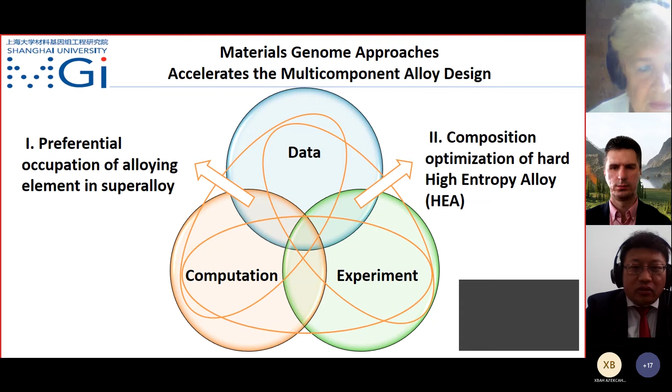The first part is machine learning prediction of alloy element occupation in nickel-based superalloy. If we look at the history of computational material science, we can classify it into 3 generations. This is part of an opinion from a review in Nature. The first generation is, for a given structure, we calculate the energy, optimize the structure, and get the property. For the second generation, we don't need the structure. We only need to know the composition, and from there we do the global structure optimization, get the structure, and then calculate the property of that structure.

Just recently, we started the third generation. Basically, it's a statistically driven design. The starting point is chemical physical data. We start from that data and do the machine learning, and then we get the composition of the designed materials, and from there we can calculate the structure and the property, etc. So basically, the starting point is data.

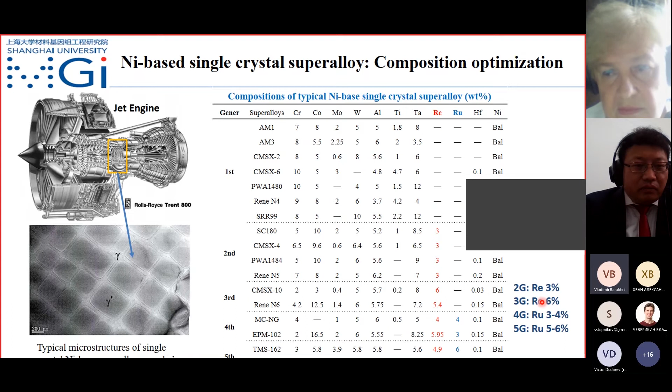For example, starting from the second generation, we add rhenium, Re, and we add more Re at the third generation, and start to add ruthenium, Ru, from the fourth generation, and add more in the fifth generation. So it's very important to understand how these key elements affect the mechanical properties.

The workflow of machine learning based research is we first need the generated data. In this case, we use first principles computation to generate the data, and then we need to design a descriptor or feature to describe the structure. Then we give this descriptor to the machine learning model and build the model for prediction. Up to this point, this is the typical process of machine learning.

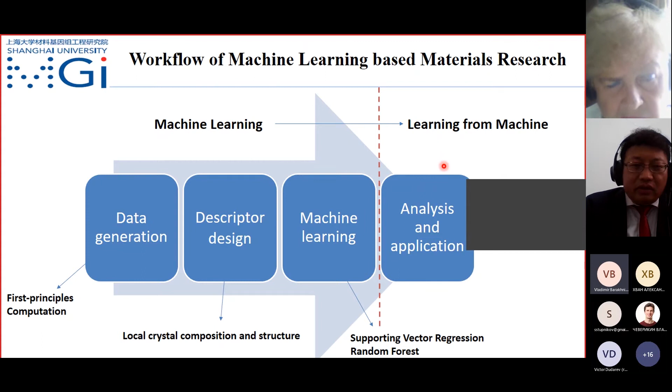But as material scientists, we also emphasize what we should do after machine learning. We should do the learning from machine. So we need to go from machine learning to learning from machine. It means after we build a good machine learning model, we need to do the model analysis and apply this model to understand the materials. That's also very important. I will give an example of how to do this in this talk.

First we need to do the computation to get the data. In this case, we have 11 alloy elements. These are common elements in the single crystal superalloy. In this case, we studied two substitution sites, either in the gamma phase or gamma prime phase, because these are the main phases in the nickel-based superalloy. And we replace the nickel and aluminum with the 11 elements.

So there are a lot of substitutions. The number of combinations is huge in principle, but in this case, we calculated more than 400 cases. It's not possible to exhaust all combinations of substitution configurations, so we just do some of them. In this case, we calculate 400, and then we hope to build a good machine learning model to predict more substitution energies.

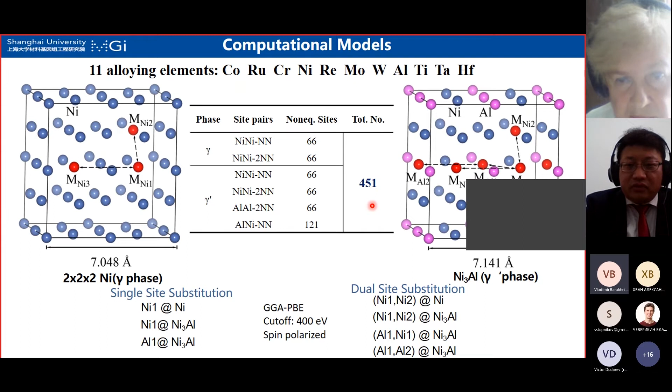So that will save a lot of computational cost. Okay, so that's the goal. So what we calculate is two things. One is the substitution energy, which is the energy change before and after substitution, and also the geometry change, how the bond length changes due to the doping. Okay, so that's basically the computational property. It is also the target for the machine learning prediction.

Okay. So then we need to build the features or descriptors. Our philosophy is that we don't want to use very expensive features. So we start from very elemental properties of the element or pure substance. These are the basic elemental properties we used in this work, including the atomic weight, density, radius, the melting point, or bulk modulus, etc.

When we were looking for this data, we got these basic properties from this website. I think many of you are familiar with this. It's called the Database of Properties of Chemical Elements from Baikov Institute of Metallurgy and Materials Science. Okay. So that's a starting point. We don't need to do a lot of expensive calculations or experiments, just use the database.

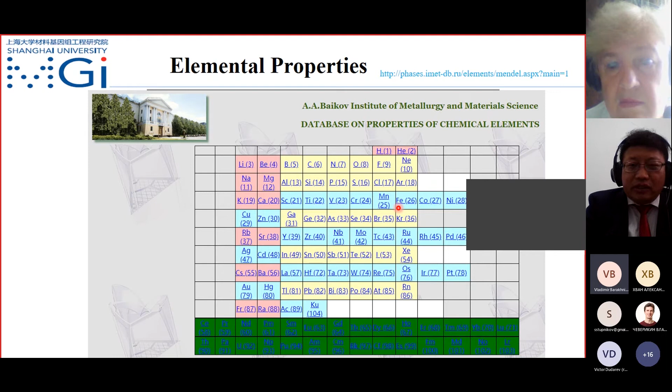Okay, so once we have these elemental properties, we need to build compound features to describe the system we are interested in. So we propose the so-called center environment model. Traditionally people use the composition model, basically just the formula of the materials, and then they do a linear combination with the mole ratio as the weight to combine these elemental properties to build a compound feature.

But in this case, we know the material property is very sensitive to the structure, not just the chemical composition. So in our model, we include the structure information into the features. We define the red atom here, for example, as the center atom. This is the atom that is going to be substituted. It's a Ni element. And then we define the first neighbor and second neighbor as the environment atoms, which contribute the effect from the environment. And then we build the features including both the center and the environment atoms.

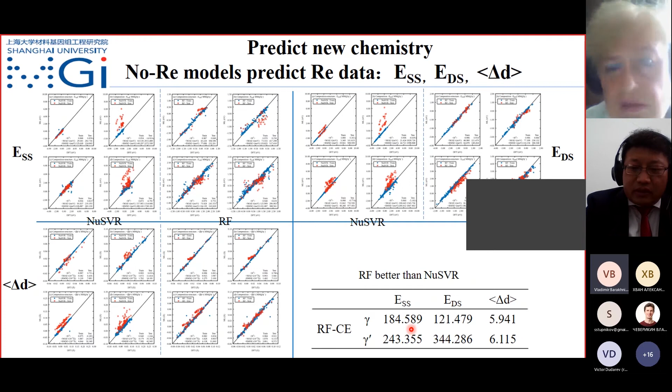So that means if we predict a completely new element that was not seen before in the training, then the prediction is not very good. It is worse than if it was there. Okay. And we compare with the leave-one-out method for each new element, and this is the result.

So basically, for most of the transition metals, it works well, not that bad, but we have a large error for aluminum and titanium. The reasons are obvious, because aluminum has p electrons, not d electrons like the others. And titanium is an early transition metal, so it's different from the other transition metals.

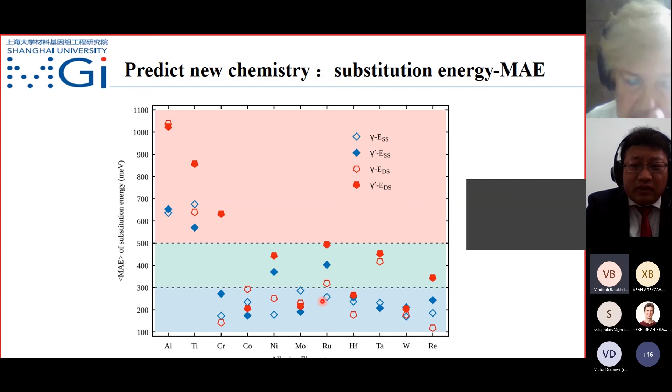So this is the prediction, and how best we can do. If we use all data, we can actually reach 20 milli-eV, so that's 10 or 20, even less than 10. So that's the accuracy machine learning can achieve. It's already sort of DFT accuracy.

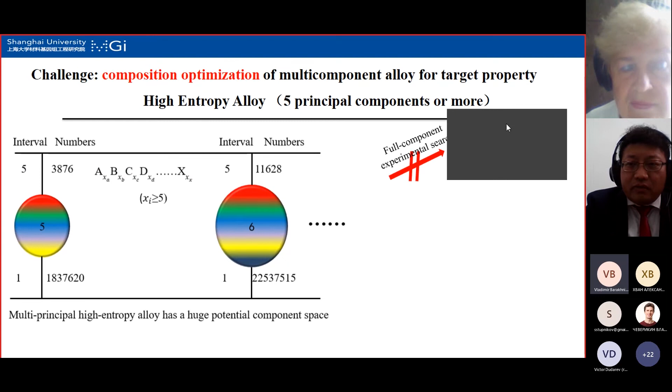So the next part is about the experiment. We use machine learning to guide high throughput experiments to optimize the composition of high entropy alloys, HEA. HEA is becoming very popular. Basically it contains 5 principal components, so it has a huge composition parameter space. With traditional methods, it's not possible to study all these materials.

So now we have new tools. The first tool is high throughput experiment tools, so we can prepare samples in less time than before. We also have a machine learning prediction model, so we can predict good compositions and do fewer experiments. Both actually accelerate the development of new alloys.

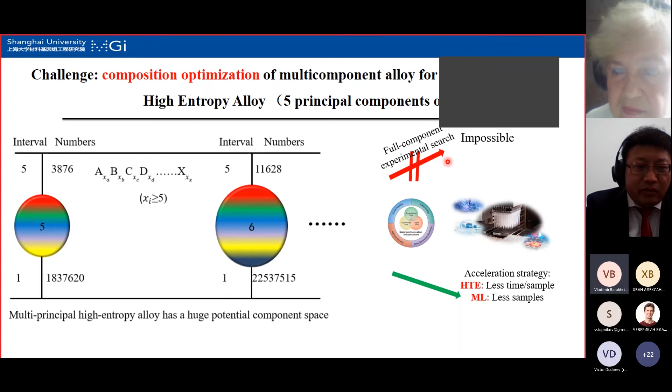So this is the workflow of our work. Basically, we have the flow of HTE, the high throughput experiment, and the flow of machine learning. We do iterative development, going back and forth between HTE and machine learning. For example, we generate data first, then build a machine learning model and predict the next experiment. Then we update our model to improve prediction accuracy and see if it agrees with the experiment. If it agrees, we go next. If not, we go back to do more experiments and more predictions.

So we do this iterative optimization until we are satisfied with our prediction and with the property of our materials, and then we can do deeper analysis of structure and property, etc. We can also dig out correlations, for example the composition-property relationship, or the descriptor-property relationship. So we need to go from machine learning to learning from machine.

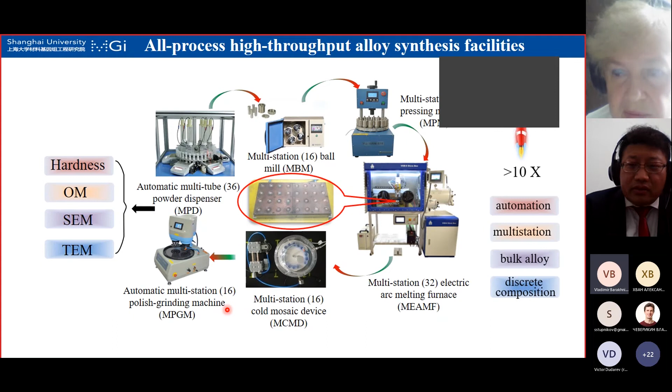All these machines are multi-station, so overall it can accelerate the synthesis at least 10 times. Okay, so then we generate the data. I'm not sure if I have enough time, so I'll go quickly and skip this unless you have questions.

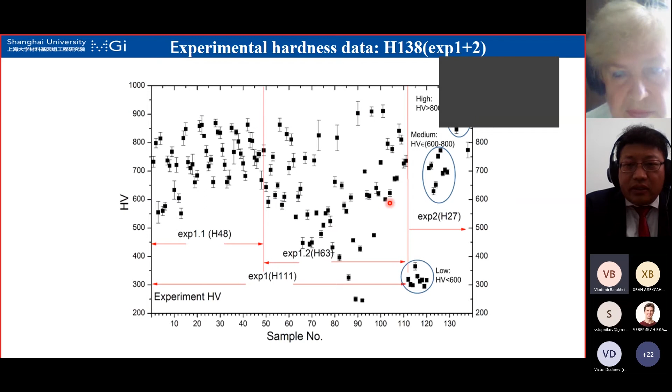We generate data first, and then we do several rounds. We measure the hardness of the alloy as the target. In the first round, the hardness values are pretty high. In the second round, we generate hardness that is medium or low, so we have data variety. That is important for building a good model. Then we predict new ones and do experimental verification, etc.

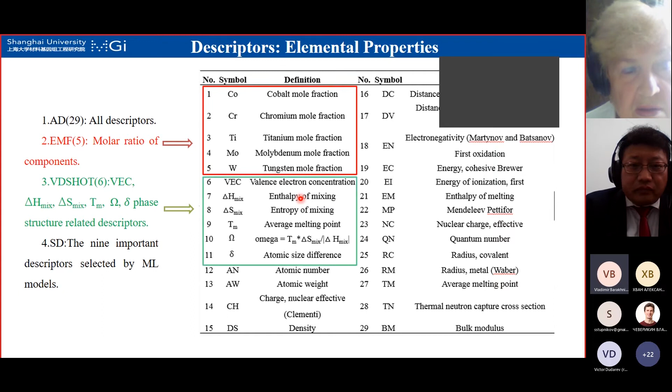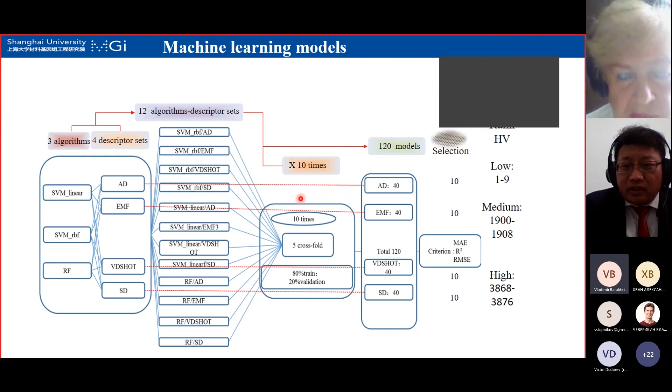Again, we start from these elemental properties, plus some compound features from the literature, like enthalpy of mixing or entropy of mixing, etc. Then we try several algorithms and combinations of algorithms and descriptors, do 10 times training, generate 120 models, and take the statistical average to get the result. So this is just sort of routine.

If we did this by traditional linear regression, we'd actually get contradictory results, which means machine learning is really necessary in this case. We do several rounds, improving our accuracy, and the best model is the support vector machine. We can reach an error around 5-6%. The intrinsic experimental error is around 2, so ours is slightly higher than the experimental error, but it's pretty good.

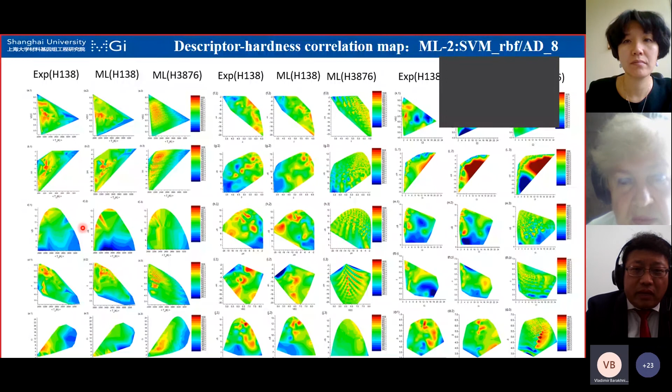This is experiment, the middle one is machine learning, and then we use machine learning to predict all 3,876 compositions. They all look similar, and with such a map we can predict hard HEA materials very quickly, for example, with high melting point and medium valence electron concentration. We can do this for all possible combinations of the features we use, so we can do very quick prediction for new alloys. The comparison between experiment and prediction agrees pretty well overall.

So I think this is the summary. We combine high throughput experiments with machine learning to accelerate the composition optimization of high entropy alloys. If we apply the HTE, high throughput experiment facility, we can accelerate composition optimization by 10 times. And with machine learning we do fewer experiments, giving a 20 times acceleration. Combining these two, 10 times 20, we can accelerate composition optimization by 200 times. MGI promised 2 times faster development, but we can do two orders of magnitude higher than the promise.

It's also important to get new knowledge by going from machine learning to learning from machine. There are many ways to do that; I showed some examples, but there are many other ways to do model interpretation. We started from knowledge driven, now we are doing data driven design, and after learning from machine we can go back to knowledge driven at a higher level. So that's the end of my talk.

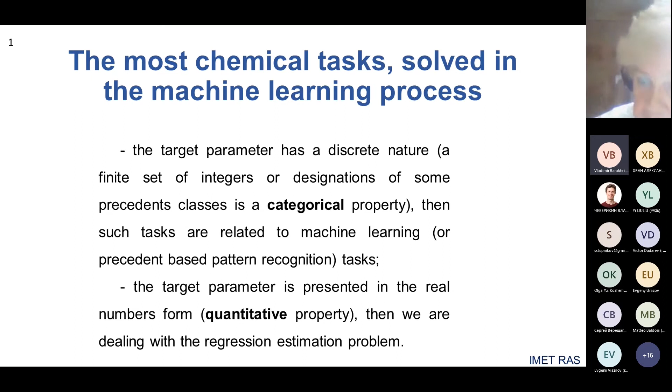Quantitative property: in this case, the target parameter has a value presented in the form of a real number. Such tasks are related to the regression estimation problem. Next slide.

Like all theoretical methods, machine learning has its limitations. The main limitation is the need for a sufficient and representative set of objects for machine learning. When predicting categorical properties, it is necessary to fulfill the main hypothesis of pattern recognition, the compactness hypothesis. In machine learning application to inorganic chemistry, the fulfillment of the latter is a consequence of the periodic law.

When predicting quantitative properties, it is important to have a statistical relationship between the target parameter and parameters of components. Next slide, please.

When developing and applying machine learning methods to inorganic chemistry, we should take into account the peculiarities of inorganic chemistry. First of all, the limited volumes of training samples, periodic dependencies of attribute values on atomic number, the target dependencies on smoothness of the attribute description, large dimension in combination with the small number of precedents for machine learning, and so on. Next slide, please.

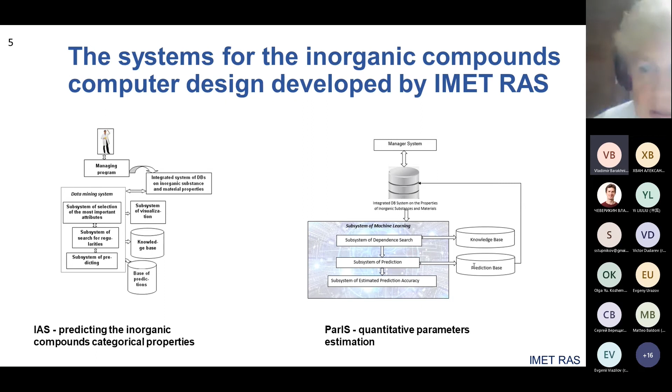Based on our experience, we will consider some of the possibilities of machine learning methods for solving problems in inorganic material science. Usually the problems of inorganic chemistry are connected with prediction of compound formation. In this case, precedent-based pattern recognition methods are successfully used.

The first task, which was solved by me half a century ago, was the prediction of new compounds of ABO3 composition. One of the most effective algorithms of that time was used, based on training of growing pyramidal networks, a special data structure in the computer memory, which accelerated the search for classifying regularities.

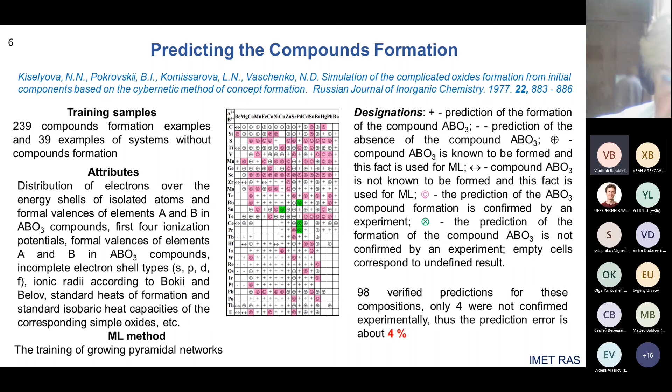Over the past years, many of these composition compounds have been obtained, and it became possible to compare our prediction with the new experimental data. From the 98 verified predictions for this composition, only 4 were not confirmed experimentally. Thus, the prediction error is about 4%. Next slide.

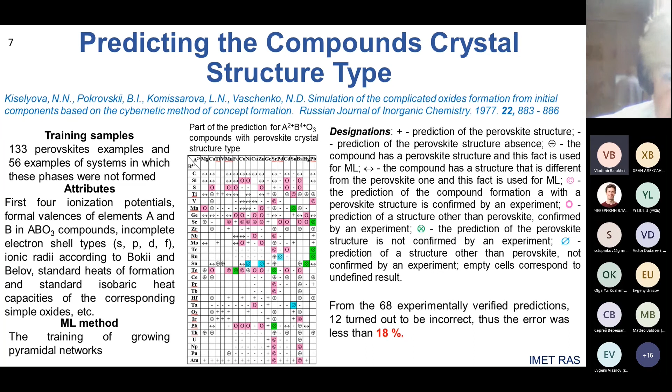Much more often, machine learning methods are used to solve the compounds' crystal structure type prediction problem. An example of such a solved problem is the ABO3 composition perovskite prediction, which we carried out in the 70s. The table shows the perovskite prediction comparison results with the new experimental data. From the 68 experimentally verified predictions, only 12 turned out to be incorrect. Thus, the errors were about 18%. Next slide.

Naturally, this very first experiment in machine learning method application is still far from the modern level. Taking into account our many years of experiments in inorganic compounds computer design, more advanced methods and programs for machine learning have been used. Now, the system for prediction of categorical compound properties includes the most popular pattern recognition programs.

The most promising means of improving prediction accuracy include collective decision-making methods. Our information analytical system developed in our institute contains several programs with such methods. Next slide.

We use other methods to improve prediction accuracy, taking into account the peculiarities of an inorganic object. One of the most successful ways to improve the prediction accuracy in the case of samples containing several classes of objects is multi-stage learning.

For expert evaluation of machine learning data, special programs have been developed for determining outliers in data. To fill in the gaps in the values of component properties, properties of chemical elements, interpolation is used, taking into account the periodic dependencies of element properties on other element parameters. In this case, the possibility of applying the machine learning method was also tested for quantitative property prediction.

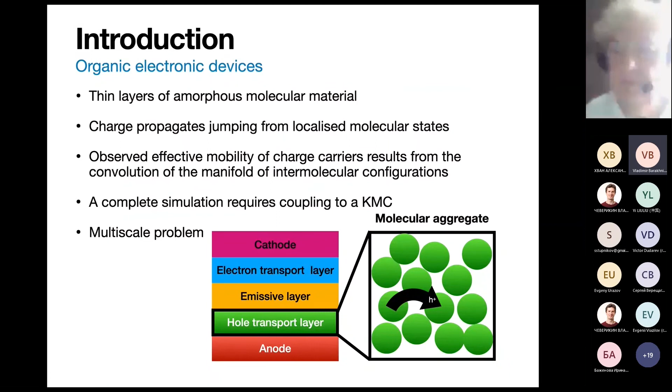So the observed effective mobility of charge carriers results from the convolution of a manifold of intermolecular configurations. In order to provide a complete simulation of the device, we need to couple these results with higher-scale simulations like kinetic Monte Carlo calculations. So this is inherently a multi-scale problem, and this is how we tackle it. This is a schematic of our general workflow.

We usually drive classical molecular dynamics codes to provide the morphology of large realistic aggregates. We analyze these aggregates from a morphological point of view, extract molecular pairs out of these configurations, and use them as input for computing the electronic coupling parameters, which are related to the flow of current in the device. Finally, we gather all of these results to provide distributions of these electronic parameters in order to scale up our simulation.

This is quite a technical slide, just to give you a flavor of the actual density functional based calculations. I hope you can see my mouse pointer. Basically, you have this kind of situation: two molecules, one charged, and this is the initial state. After a jump of the charge to the nearest neighbor, we have this movement of charge from one to another. So this is the initial state, and this is the final state.

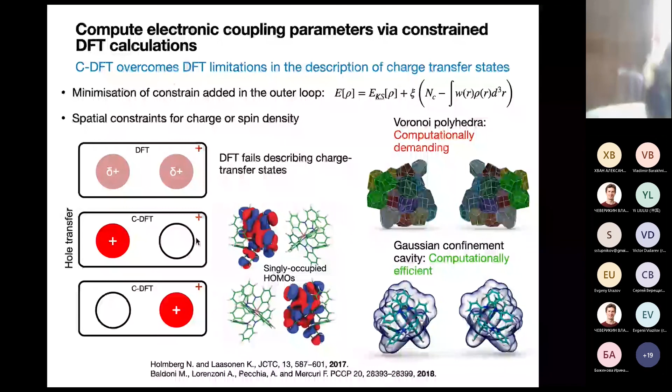So basically we can force the DFT to give us the right results in the two charge transfer states. And this is something from the past that we have done already, but there is no machine learning yet. So these are some results from what we have already published. At the beginning, we did some tuning of the method. We created some artificially modified configurations of molecular pairs, and we artificially moved them in order to understand how the electronic coupling is influenced by the configuration of the molecular pair.

So here you can see how this quantity is related to the distance between the two molecules, and really it's influenced by the rotation along some specific axis. So from this idealized structure, we go then to a more realistic sample of molecular aggregates. This is what you can get out of the molecular dynamics simulation.

We extract all the molecular pairs in several of this kind of sample. We do an analysis of their morphological and geometric configuration and calculate the electronic parameters for each couple, and then provide a distribution of these diabatic electronic coupling parameters.

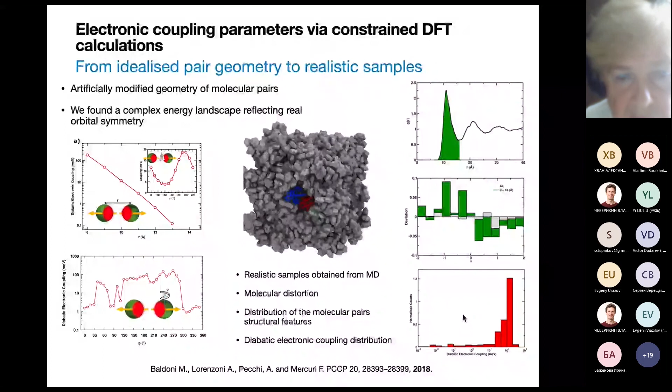So in order to provide a good distribution of these electronic parameters, we need to simulate thousands of these molecular pairs. And even though our implementation is quite computationally efficient, constrained DFT simulations are relatively computationally expensive. So we need at least 4 hours for each pair on a high-end computational node. So we do believe that a machine learning approach can increase dramatically the overall throughput. So we want to train our machine learning algorithms on the results obtained from constrained DFT calculations.

Apart from the algorithms themselves, it was immediately clear to us that data representation is crucial for this kind of problem. Why? Because the input and somehow the output of multiscale simulation are this kind of thing. So you have a representation of the structure in terms of a table, in which in each row you have 4 columns. The first one is about the element at a certain position, and then you have the X, Y, Z coordinates of the atom.

Usually this is all that you need for ab initio calculation, and this is an extremely human-friendly data representation, but it's not machine-friendly at all. And on top of that, it depends on the order of atomic entries, and it's not invariant with respect to translation and rotation. So we want to convert the feature, the atomic coordinates, into a more machine learning compatible format. It has to be, unfortunately, still human readable because we need to modify it by hand from time to time.

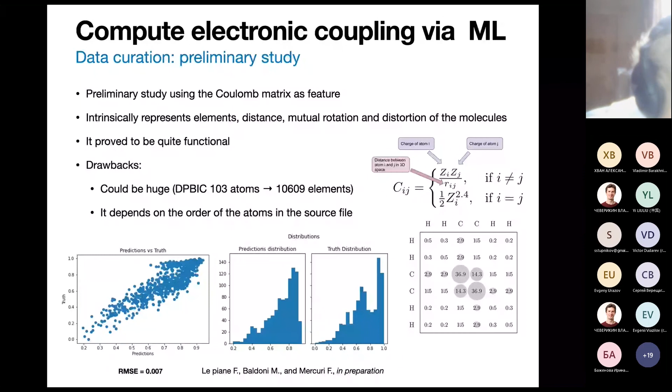So we made some tests and we found the best feature setup. So we can describe the distance, which is a major factor, as a scalar distance or as a vector distance, which is slightly better. Probably just because in the vector distance you have 3 components, so you have more degrees of freedom from a computational point of view.

The mutual rotation of the 2 molecules in the pair can be represented with quaternions or with the rotation matrix, and we found that the rotation matrix representation is the best one. The molecular distortion, which has a small influence but is still important, is represented by RMSD, so the root mean square displacement of the atomic position of the molecule in the real aggregate compared to the molecule in its idealized geometry, optimized in vacuum. So our best feature set is the distance vector plus the rotation matrix plus the RMSD.

So this was about the data structure, and I told you that this is the most important problem that we have to analyze. But of course, algorithms are important as well. So we tested 3 models. Actually, I didn't do that, but this is the work of our new PhD student, Fabio Le Piane, who has a very strong background in machine learning, and he is very helpful in this kind of situation. So he tested the random forest, a gradient boosting, and a kernel ridge regression. And he found that this is the best algorithm for our purpose.

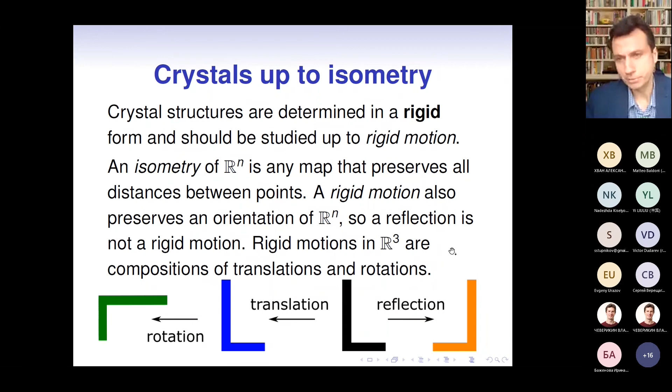Only for simplicity, I will talk about isometries, but if you know that two crystals are isometric, then it will be easy to distinguish them up to reflection as well. So only for simplicity, we will talk about isometry invariants. Invariants were mentioned in several talks this morning. So let me formally define it, because in mathematics, it's a very important concept in almost all branches.

So an invariant is a property. It could be a number, it could be a vector, a matrix, or even a more complicated object. But this invariant, property or function, should take the same value on all equivalent objects. So in our case, on all isometric crystals.

For example, we could start from a hexagonal lattice, and this hexagonal lattice could be represented by many different unit cells, primitive, non-primitive. But our aim is to map all these initial ambiguous inputs into one value of an invariant. Because all given representations should map to the same value, it is an invariant. And similarly for a square lattice, you could start from different representations, but an invariant should have the same value.

If you use non-invariants, for example, edge length of a unit cell, then this non-invariant can easily take two different values on two crystals, and we can make no conclusion in general. These two crystals could still be equivalent or still be different. That's why it's very important to use invariants. If an invariant takes different values, then our objects are certainly different.

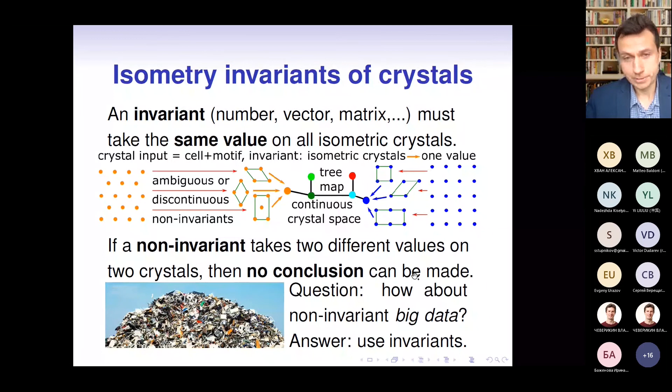Right. So what invariants are known? Of course, crystallographers knew about the ambiguity of a primitive cell, and tried to find a so-called canonical or reduced cell. One of the best such examples is Niggli's reduced cell.

However, any reduced cell, including Niggli's cell, is discontinuous under small atomic perturbations, as you can see in this very simple example. Let's start from a square lattice and perturb every other point slightly, so shift every second point from its position. Then immediately, any primitive cell, including Niggli's reduced cell, will double in size. So instead of a small square, our minimal unit cell will have twice larger volume, or it could even quadruple its volume.

So what does it mean? It means that this reduced cell is discontinuous, unstable under almost any atomic vibrations. That's why it's important not only to use invariants, but also to use continuous invariants that change only slightly under perturbations. So it would be nice, for example, to design invariants that see a small difference between the initial unit square lattice and a slightly perturbed periodic point set. Only in this way can we continuously quantify crystal similarity, the similarity between very similar, nearly identical crystals.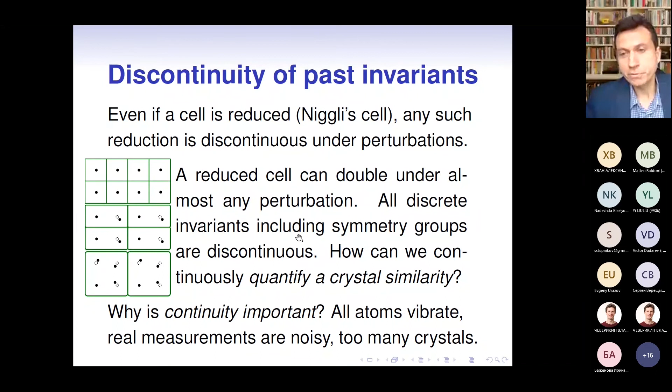So again, why is continuity important? All atoms vibrate. Of course, you know all real measurements are noisy, and the motivation from crystal structure prediction: we have too many crystals, at least too many predicted crystals.

So very briefly, crystal structure prediction aims to discover crystals by simulating them on the computer, and usually they start from almost random configurations of molecules put in almost random positions in a random unit cell, only making sure that they do not overlap, and then they perturb the positions to minimize the complicated energy function. Usually the lattice energy function, which we will discuss later in this talk.

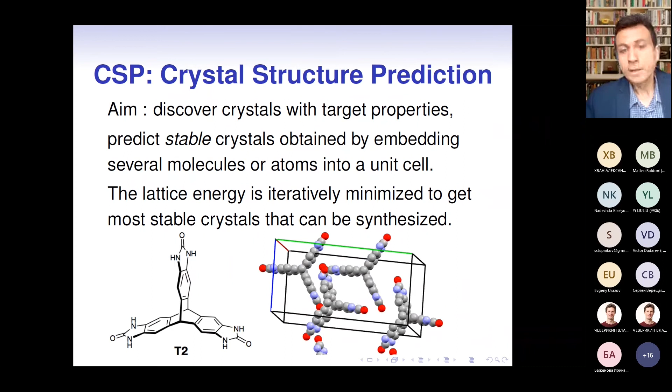And this approach in crystal structure prediction leads to the so-called embarrassment of over-prediction, which is the term coined by Professor Sally Price when I talked to her personally. So she simply said that many state-of-the-art crystal structure prediction tools output too many predictions, which approximate local minima of this complicated energy function. So of course, if we rerun our prediction algorithm many times, then inevitably we can easily finish close to the same local minimum, but coming from different directions.

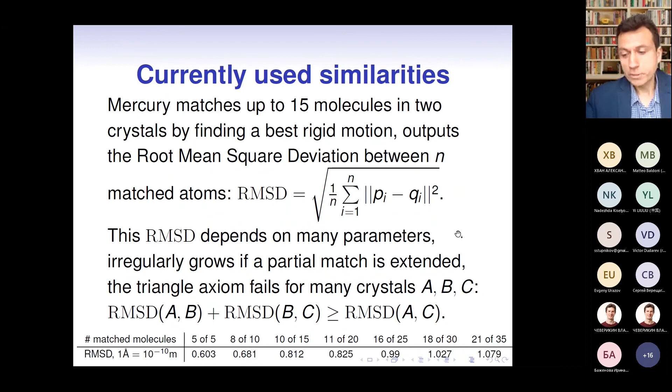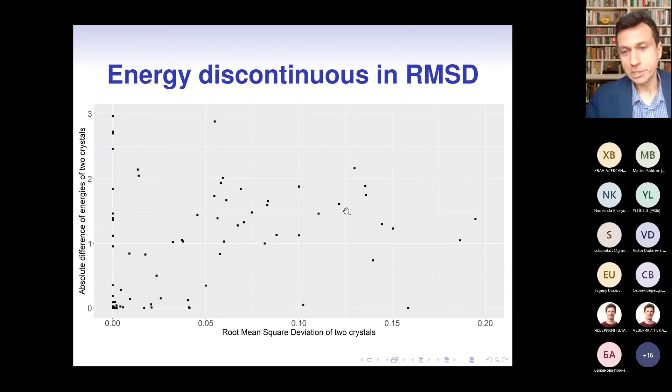So that's why we kept looking and designing new invariants, distance-based invariants in this case. And indeed, distances were mentioned in several past talks as good invariants of periodic structures. So that's a formal definition of the average minimum distance. We start from a periodic point set. And for every point Pi, we look at distances to its neighbors. First neighbor, second neighbor, and so on. So in the first picture, you see the square lattice. So the first neighbor of the origin has distance 1, and similarly, we have actually 4 neighbors at distance 1. Then we have 4 neighbors, diagonal points at distance √2, 4 neighbors at distance 2, and so on. For the hexagonal lattice, these distances are similarly increasing, but differently.

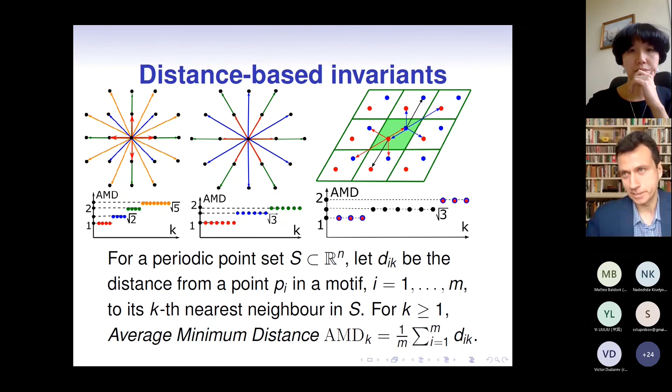But today I focus on the simpler AMD because the average minimum distance is a vector of numbers. So it's AMD1, AMD2, and so on, up to a given number k of neighbors. And this number k is a parameter. However, when we increase k, we don't change any previous values of the AMD invariant. So this k can be considered as an order of approximation, or the number of decimal points on your calculator. So you could compute up to 2 decimal points or up to 100. So you simply make better predictions.

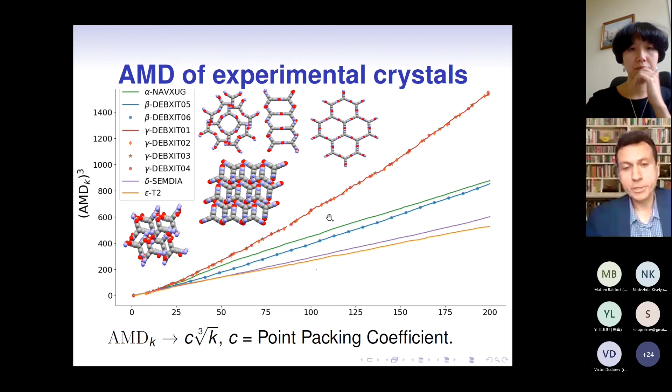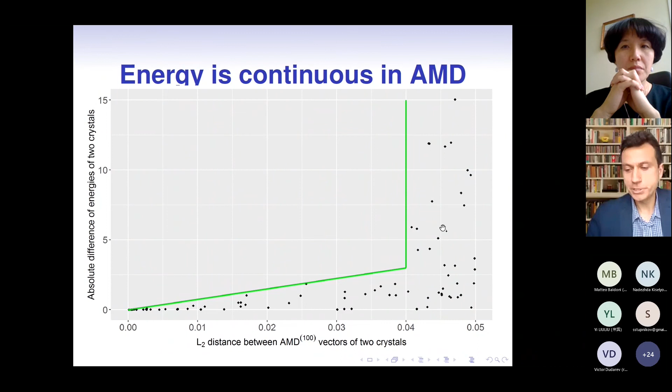Right. So this slide shows experimental computations for 9 experimental crystals, and let me go quickly to the continuity statement. So you see when the difference between AMD vectors changes slightly, the energy changes slightly, and this picture is very different from the previous one when we considered RMSD and powder X-ray diffraction patterns.

So you have noticed that we considered only points and no chemical information at all. So that's the key idea of periodic geometry, a new area looking at crystal structures from a pure geometric point of view. And this periodic geometry approach has already found interesting cases in the Cambridge Structural Database.

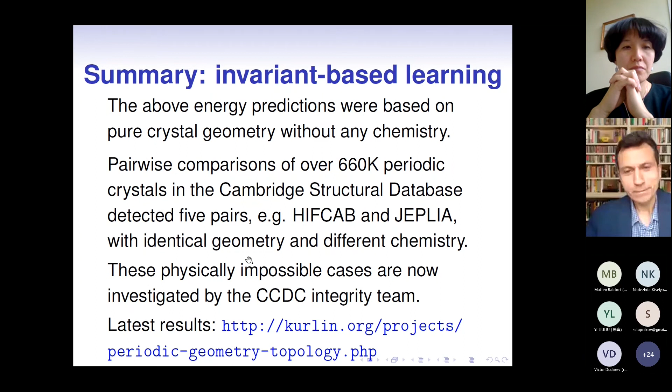So we detected 5 pairs. So this is one example where geometry was exactly the same, but chemistry was different. So all crystallographers told us that this is impossible, and indeed with... CCDC is now investigating... for this case.

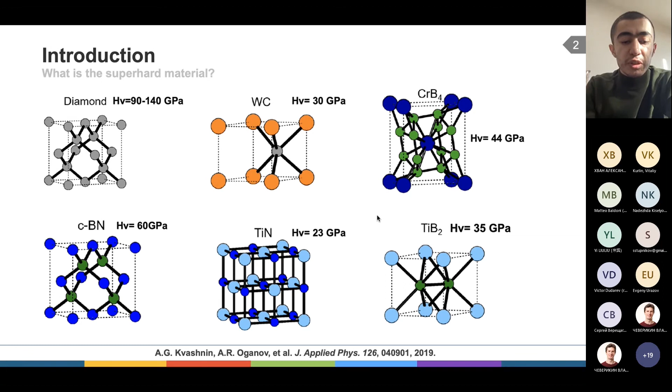Due to their unique properties, high hardness and also high melting temperature, superhard materials are widely used in many industrial applications, like stamping and cutting tools, drilling equipment, and also in spacecraft. For example, drilling equipment, which is needed to produce oil, usually uses polycrystalline diamond or cubic boron nitride, or a mixture of them.

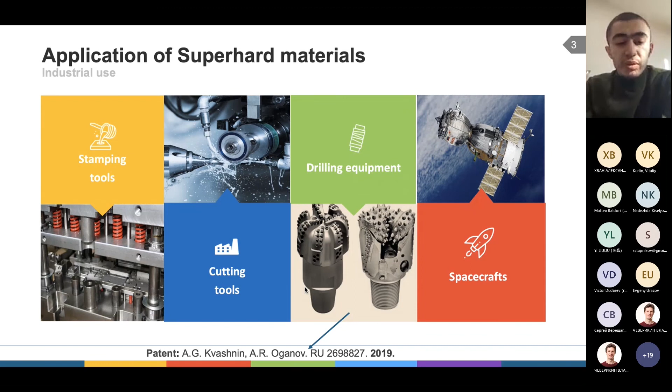And the main direction of development in this field of technology is the replacement of traditional expensive materials by new ones with improved properties. And due to the fact that most synthesized new materials are polycrystalline or multi-phase materials, there is a need to create methods that can describe the mechanical properties of such complex systems with high accuracy. And of course, existing quantum mechanical methods are expensive and not able to describe such large systems. Also, they have a good accuracy.

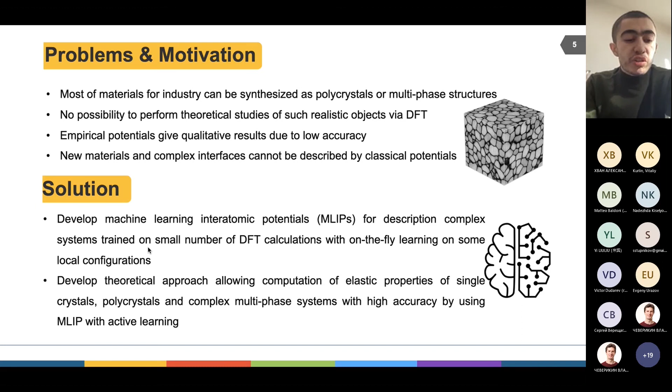And also classical empirical methods are able to describe such systems, but the accuracy of calculation is rather low. Moreover, in polycrystals, there is an interface between grains that does not have a crystalline structure, and describing exactly the grain boundary is a difficult task for empirical potentials. And to solve this problem in our project, we developed an automatic algorithm for calculating the main mechanical properties of polycrystalline materials where the interatomic interaction is described by machine learning interatomic potentials.

We employ the moment tensor potentials as a model for approximation of density functional theory calculated energy. MTP, moment tensor potentials, are based on a representation of atomic environments as a tensor of inertia of different ranks, in practice usually fifth rank, multiplied by a radial polynomial function. And the main goal is to estimate the set of parameters which define the form of the moment tensor potential as a function of the training set.

The training of the MTPs can be done by solving the minimization problem. This type of potential accounts for local atomic arrangement and expands the total configuration energy into the sum of contributions of individual atomic environments, which we can also call atomic neighborhoods. Each neighborhood contribution is expanded through the set of basis functions. When fitting to the energy values, we need to solve the overdetermined system of linear equations, and each equation of this system is produced by a certain configuration, and it can be called the active learning set.

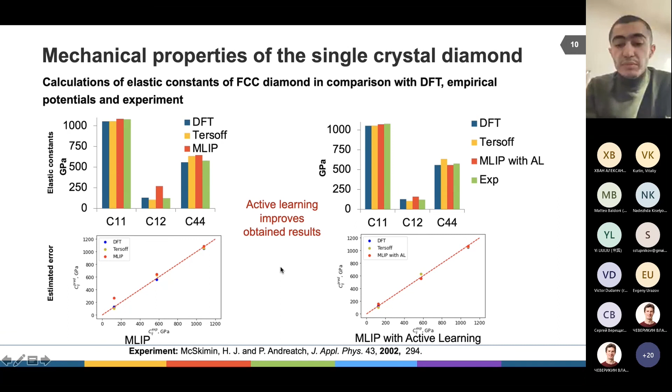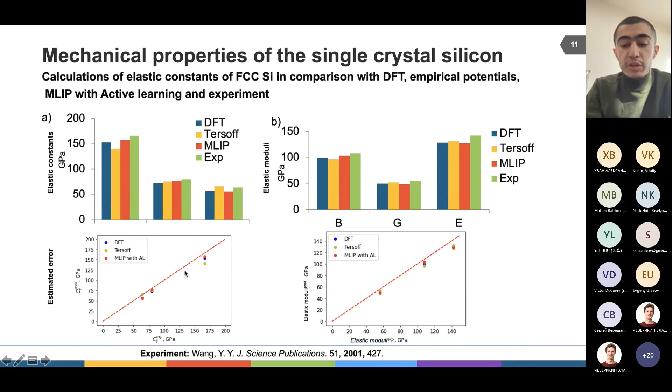Here you can see the results of calculation of elastic constants for cubic silicon in comparison with other methods like DFT, empirical potentials, and also machine learning interatomic potentials with active learning, and experimental results. As you can see, in this case the machine learning interatomic potential also shows good results. Here are results for 3C cubic silicon carbide in comparison with DFT, empirical potentials and machine learning interatomic potentials with active learning. And as you can see, in this case the machine learning interatomic potentials also show the best results.

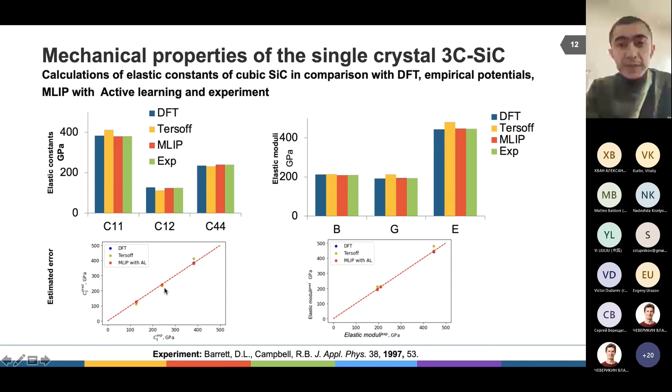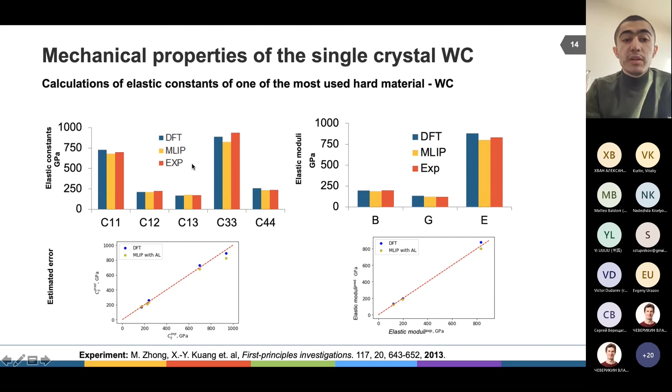In conclusion, we can say that among the used calculation methods, the machine learning interatomic potentials with active learning can optimize our results of elastic tensor calculations and show the best results for monocrystals for now. We developed and tested an algorithm for calculating the elastic constants and elastic moduli for single crystals. And future prospects can be expanding the MLIPs to polycrystals.

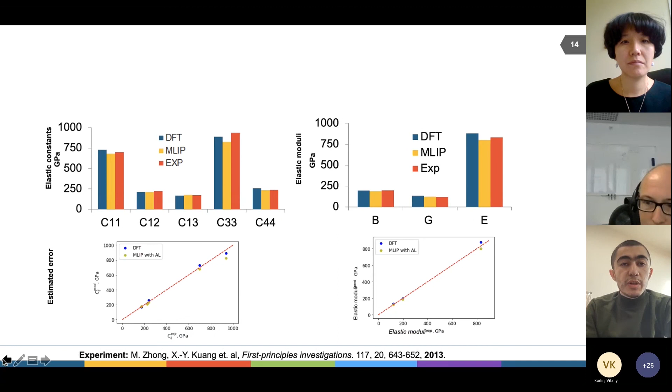Is there any research in this respect? Probably there might be usage of the carbon to put into this ferrum structure to make it harder. Yes, right now in the Skoltech, in the Shapeev's group, which developed this machine learning interatomic potential code, they are right now working on it. They construct some alloys and develop some potential for this, and they use these potentials. Different potentials and different models.

But in our case, we constructed only the polycrystals, and we are right now developing potential for polycrystallines. But yes, it's possible to develop also for alloys, some composite materials also.

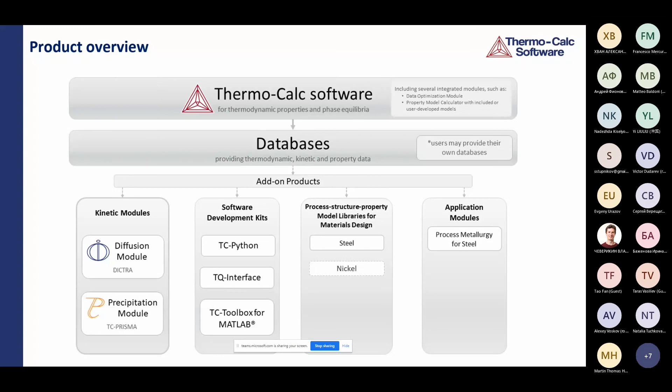We also offer what we call process-structure-property model libraries for materials design. Here we have a steel library out already, and now in December we will release another one for nickel. I will show you a little bit more about the steel library later on. And we also have one application module which is specific to process metallurgy for steel simulations. And of course, I mentioned we have a lot of different databases for thermodynamics, kinetics, and properties, and we have them available for all these major alloy systems, as you can see on the screen. We also have them for high entropy alloys, copper alloys, and so on.

So just some brief words on what you can do with Thermo-Calc. You actually do calculations for a given thermodynamic system. So you can predict amounts and composition of phases, transformation temperatures, solubility limits, and so on. And you can also predict a wide range of materials property data. It could be thermophysical properties. It could also be kinetic properties. We also have some mechanical properties such as yield strength and hardness. But it could also be properties related to equilibrium and non-equilibrium solidification, using the Scheil module, for example, inside Thermo-Calc.

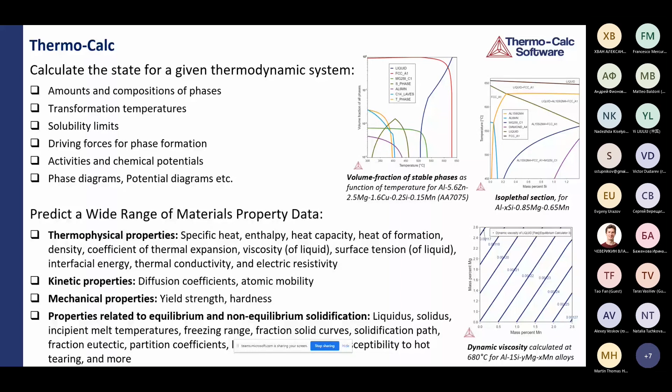Using the kinetic modules, DICTRA and TC-PRISMA, one can simulate the evolution of microstructural aspects as a function of time. That could be microsegregation during solidification, homogenization, allotropic phase transformations, or interdiffusion in compounds, if you have coating systems, for example, or dissimilar joints, and so on. Using TC-PRISMA, you can also predict the concurrent nucleation, growth, dissolution, and coarsening of precipitates, and also predict the temporal evolution of particle size distribution, and get the average particle radius and number density, volume fraction, and compositions of the precipitates.

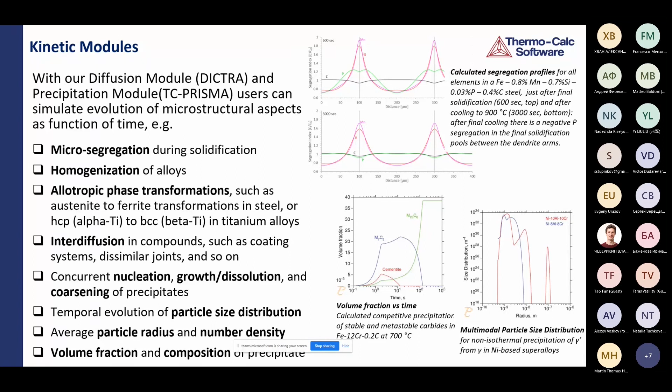And using the TC-Python programming interface, you can actually develop your own model and plug it into this framework. That means you can then use all the plotting functionalities inside Thermo-Calc, and all these calculation types as well.

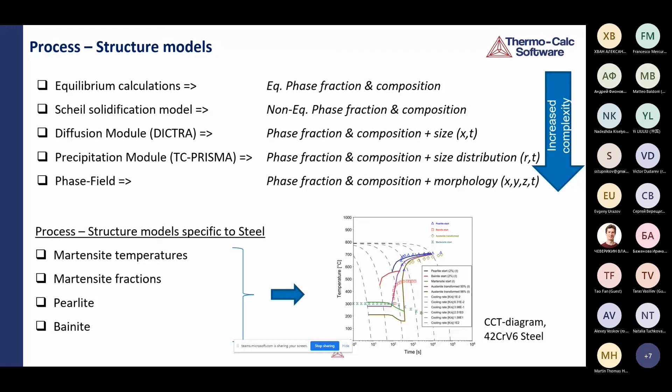Okay, so I will talk a little bit more about data and what kind of data is available. And I will start with this kind of buzzword in Industry 4.0, which is actually related to data, or the integration of data related to artificial intelligence, machinery and communication, to create an efficient industrial ecosystem that is not just automated but also intelligent.

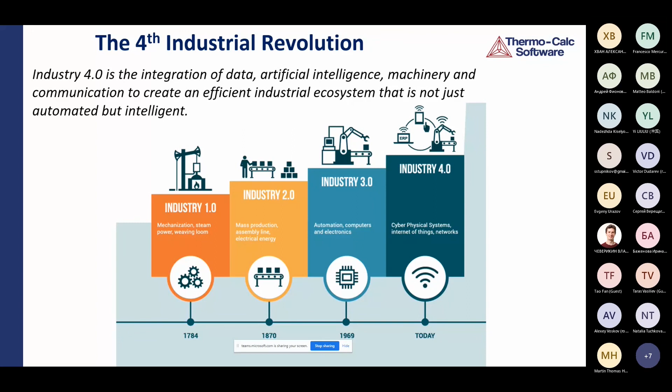And our view on this is that we are in some kind of the fourth material revolution as well. Materials 1.0 could be a very, very long time ago, when humans started to discover materials and use this kind of empirical science. Then at the beginning of the 19th century, materials 2.0, we started to systematically do materials research using experiment, testing, validation, and so on. Also understanding the physics and chemistry of the materials, and the laws of thermodynamics.

Then in the 1970s, we have materials 3.0, when computational materials science started, and that has of course evolved a lot during the last 50 years. And today we are in what we call materials 4.0, which is more about big data-driven science, multiscale modeling, virtual manufacturing, and what is called digital twin, and so on.

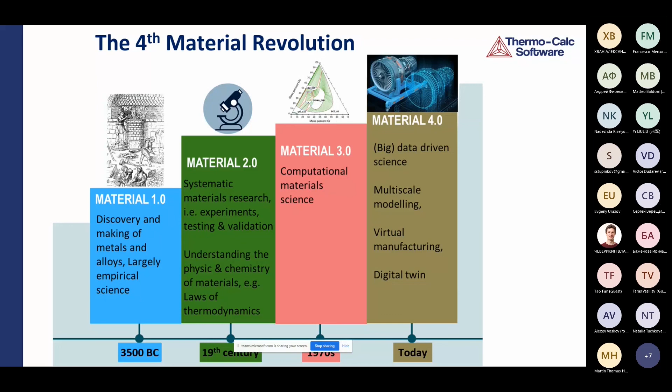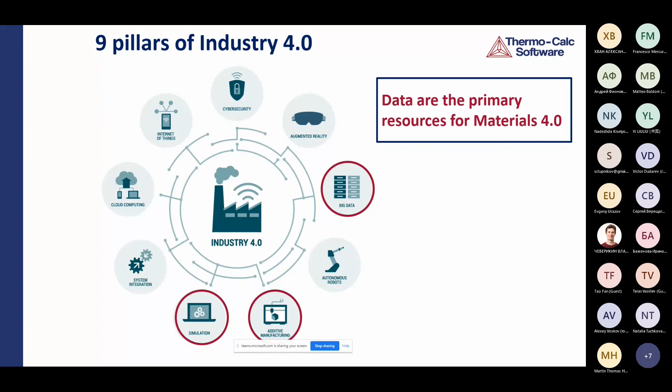And what kind of materials data do we need? That could be a lot of different data. Could be thermal properties, chemical properties, mechanical properties, magnetic properties, manufacturing properties, of course, electrical properties, acoustic properties, and so on. And we cannot, of course, predict all of these properties, but we can predict some of them.

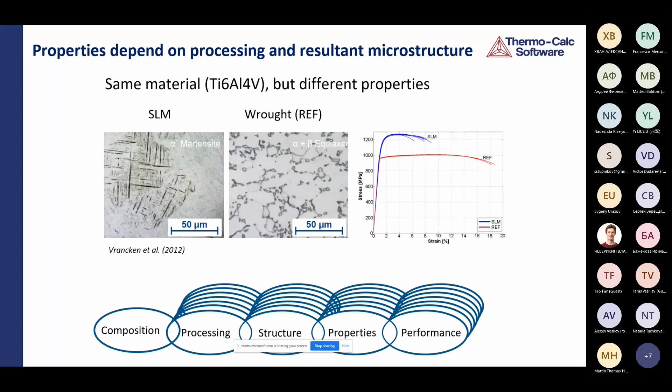So I just want to give some definition of what we call digital twins. The Fraunhofer Institute in Germany states that to ensure the digital networking of production systems and the optimization of material-specific requirements, we need to measure, analyze, and replicate the changes in material properties in a process in which digital twins of materials are created. So that's the definition of it. And to achieve this, we need to understand the process structure property relationship of materials, which also relates to integrated computational materials engineering.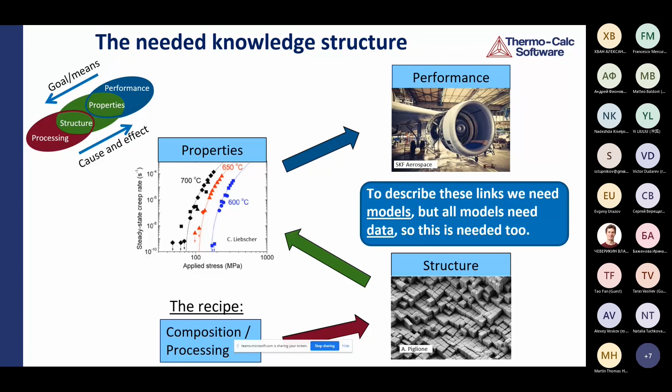So to describe these links between structure, properties, recipe, performance, we need models. But all models also need data, so this is needed too. That's why data play an important role. And we have a materials data challenge. In the materials field, we have a challenge in that we don't have as much data as we would like to. In other words, we typically have small amounts of data and not big data.

And traditional data sources are experiments that are costly, time-consuming, and we need new experiments for each new material or novel process to be able to use experiments. We also have handbooks. Handbooks contain a limited amount of data and no data for new alloys or novel processes. So these sources have limited use for design of new materials. An alternative data source could be repositories that contain more data, but still only for existing or known materials.

And in order to design new materials, we need processing and analysis of existing data. And this is achieved by phenomenological and statistical models, regression analysis or machine learning, but also through engineering calculation, including mechanistic models. And by this, we can make the data more useful and valuable.

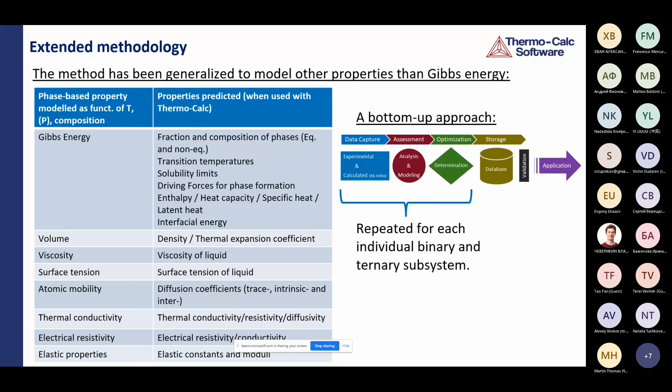And I talked a little bit about this already. So based on this CALPHAD data, we can take it even further to predict physical properties using physics-based models. Examples of what we have today are yield strength and hardness. And I also mentioned before that using programming interfaces in Python, a user can add their own property models into this framework.

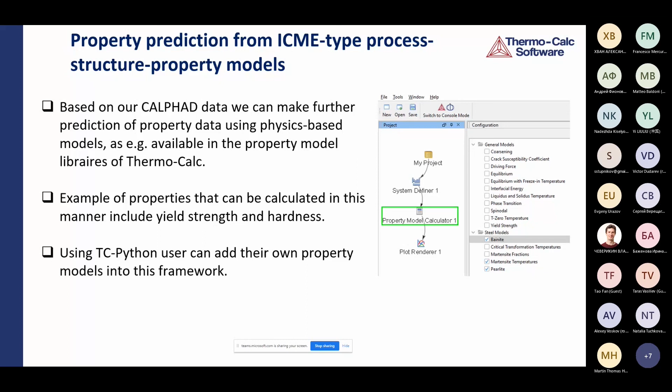So this is just a summary of a lot of different properties that you actually can predict today, and also what kind of materials you can apply them for. You can see for steel, nickel alloys, aluminum, magnesium, copper, titanium, noble alloys, and so on. So these are phase equilibrium data. I will not read all of them. You can see it yourself.

And we also have physical properties, and that could be like enthalpies and interface energies and so on. But lately we have also worked a lot with thermal conductivity, resistivity, diffusivity, and electrical resistivity and conductivity, for example, and also viscosity of liquid and surface tension of liquid. And today we actually have them for most of our bigger databases. It could also be kinetic coefficients, for example.

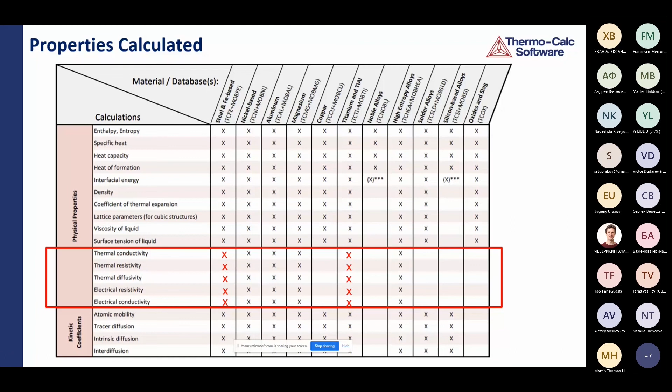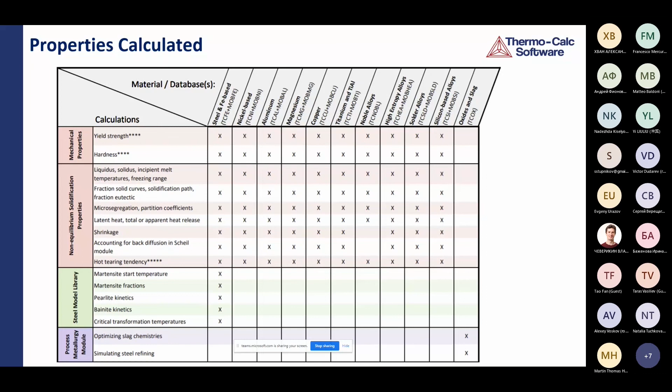Other properties could be mechanical properties, yield strength and hardness. It could also be non-equilibrium solidification properties. That could be very important for additive manufacturing, for example. We also have the steel model library where you can get a lot of data from martensite, pearlite, bainite transformations. And with the process metallurgy module, you can optimize slag chemistries and simulate the steel refining processes.

The diffusion module DICTRA, I will not go through what you can do again, but you have a lot of data that you can generate using that module as well. And the same is applicable for the precipitation module TC-PRISMA.

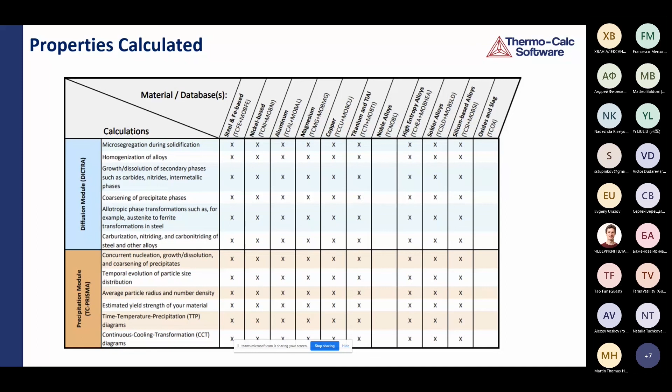So as mentioned in the beginning, materials are complex hierarchic systems, and it's necessary to do multiscale modeling, and CALPHAD actually provides a bridge between atoms and microstructure. So when generating a CALPHAD database, data could be thermodynamic, kinetic, thermophysical, and mechanical. Not only experimental data is used, but also quantum mechanical calculations, DFT, are used as input data.

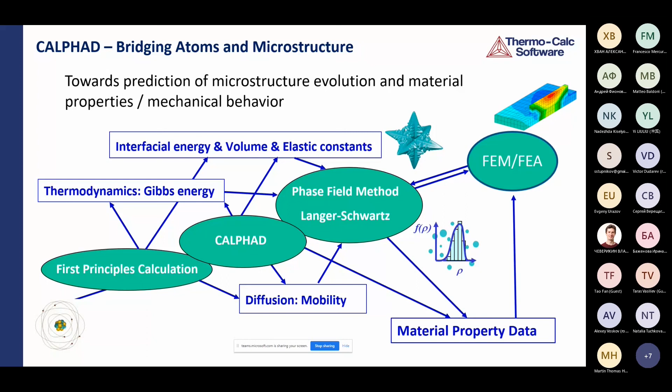So CALPHAD data is then used to predict the evolution of microstructure using different approaches. It could be phase field or Langer-Schwartz simulation. And this result can in turn be used as input in FEM simulations as well. And CALPHAD data can also be used directly as an input to FEM simulations.

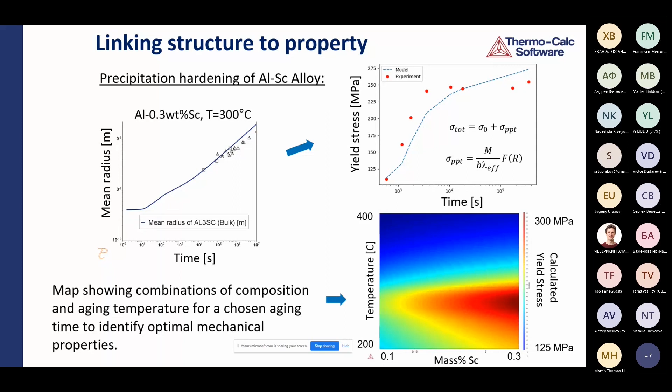Another example could be application to process modeling. So that's to get towards the digital steel plant. And here we're using the process metallurgy module inside Thermo-Calc for simulating kinetics of steelmaking and refining. So it was done using the graphical interface, but then you can also use it in Python to set up a calculation where you have a model configuration of kinetic parameters, and you can use the steel plant specific data. You have probably a different kind of materials composition for that kind of steel process.

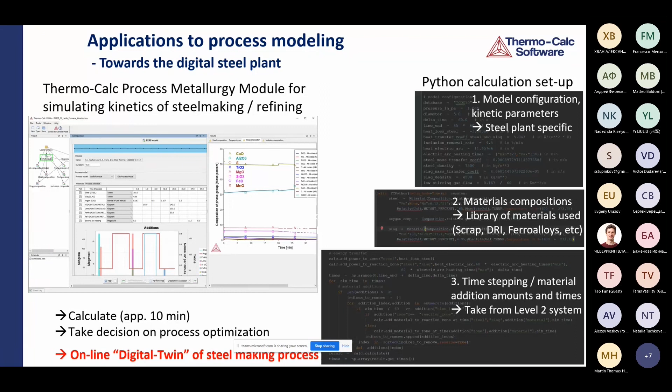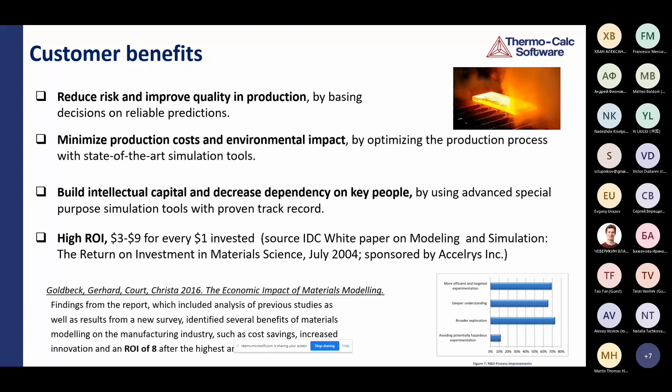I will jump over these and go directly to my summary. Some materials are complex hierarchic systems, and their structure at many different scales, of course, determines the resulting properties and eventually the performance of the materials. And I also think that our design space is almost unlimited. We haven't stopped developing new materials, that's for sure. And we also need new materials for high demand applications for the future.

So in order to stand a chance to efficiently explore this design space, we need models, tools, and data that can predict the influence from composition and processing on structure, but also the link between the structure and resulting properties, of course. And I believe that CALPHAD provides a robust framework that integrates experimental and theoretical data that extends to multi-component systems, which can be used for this, of course.

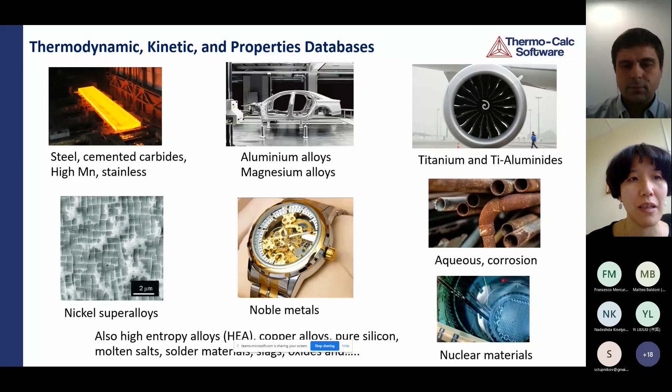personal computer. And you can decide every time what kind of step you need, what is the step size of the calculation. You can vary it, and you can vary the region of the calculation. Did I answer your question? Yeah, fully. Thank you very much.